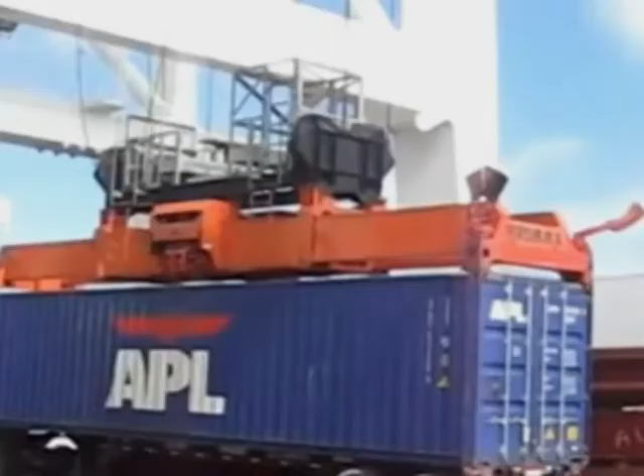Logistics is one of the lifelines of our economy. With globalization shaping our future economy, the need to transfer goods efficiently across countries becomes more and more demanding. We plan to provide a fast, economical, and environmentally friendly solution for logistics of goods across any terrain. Ideally, our vehicle drives off-road in the outback from point A to point B.

Truck drivers traveling long distances are most likely to experience tiredness and fatigue. Fatigue affects the driving ability and the driver's reaction to avoid a crash in an emergency. A study based on coroner and police reports found that 30% of rural crashes in Western Australia could be attributed to fatigue, while 20 to 25% of all fatal car accidents in Victoria are caused by fatigue.

In March 2010, a truck collided with a station wagon that was idled in N7's breakdown lane, killing a man behind the wheel. 2 weeks later, another truck ran into a group of cyclists riding in the bike lane of the N4, killing a man and injuring 3 others. Our aim to provide a fast, economical and environmentally friendly solution for land-based logistics is demonstrated in our driverless system.

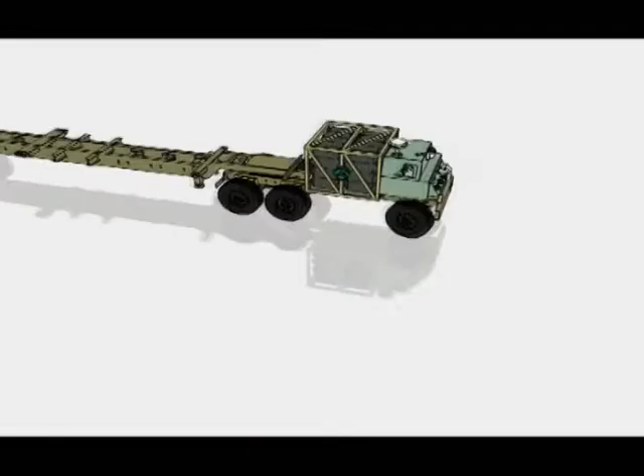Capable of off-road transport, this autonomous vehicle serves to provide a nationwide logistic pipeline between cities and industrial facilities such as mines and ports. To accommodate the needs of today's transport industry, our trailer bed is capable of carrying a variety of standard payloads: 40-foot containers, 20-foot containers, bulk goods and materials. By complying with International Organization for Standardization rules, our solution is easily integrated with existing logistical systems.

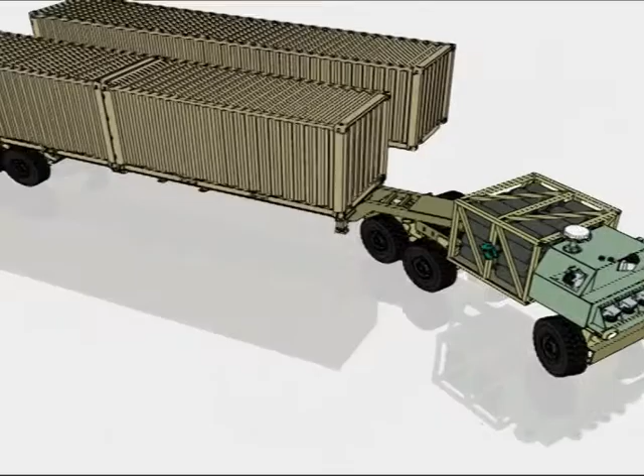Fifth wheel coupling provides a versatile trailer connection platform, allowing the clients to select an existing trailer based on their need. TAK4 independent suspension improves maneuverability, ride quality, and off-road mobility. With proven success on thousands of defense, firefighting, and tactical vehicles, TAK4 tackles the most treacherous terrains. Driving through rugged environments requires superior off-road capabilities such as superb shock absorbance, mechanical rigidity, and robustness. We have met these requirements.

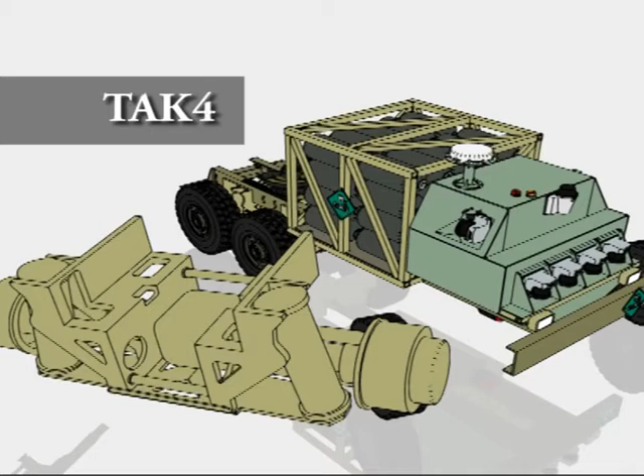The vehicle is driven by 3 70 kilowatt AC motors, where each is powered by a PWM inverter. The peak power output is estimated to be around 420 kilowatts. The nominal output is 210 kilowatts. Our vehicle utilizes hydrogen fuel cells to provide constant power of an extended duration. To store a sufficient amount of hydrogen, the gas is compressed to 700 bars. The robot is able to drive up to 500 kilometers using 120 kg of hydrogen.

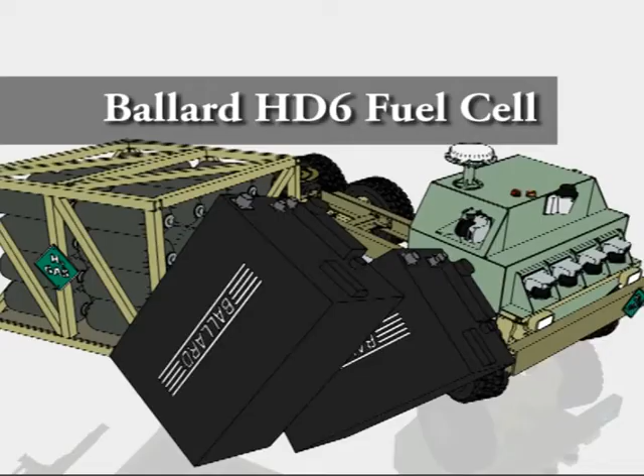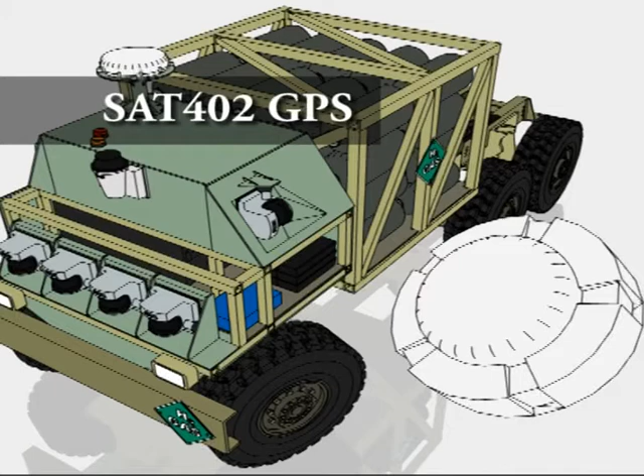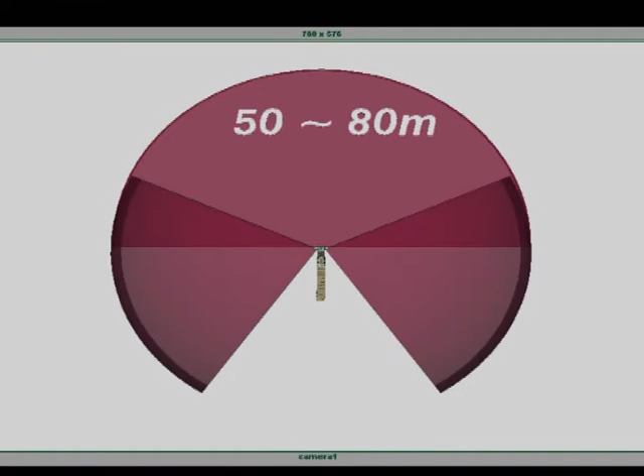To ensure fast data transfer between system components, CAN bus is employed on the vehicle. The Vehicular Terminal Explorer 727 turns our vehicle into a mobile communication hub. This, in conjunction with the SAT402 GPS system, ensures we can monitor the vehicle at all times. To effectively scan the environment, 6 mid-range LMS 221 and 1 long-range LDLRS 3100 SICK lasers are utilized. The long-range sensor is used to detect the static conditions of the environment, whereas the mid-range sensors are employed to detect dynamic obstacles, thus ensuring the safety of the vehicle and bystanders.

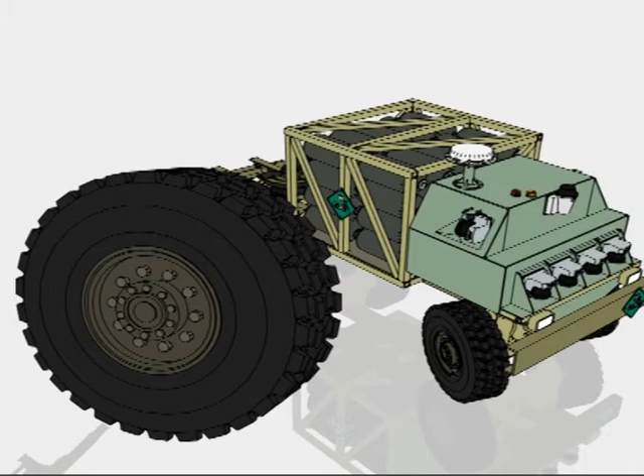Michelin's XZL all-terrain tubeless tires increase longevity, improve braking distances, and reduce rolling resistance, thus bringing fuel costs down. Providing excellent traction, these tires increase overall vehicle performance. The chassis is pretty similar to that of a regular heavy-duty truck. It consists of a rigid steel frame of C-shaped rails riveted together by cross members running across them. The roll cage is a conventional aluminium Pratt truss used to house the hydrogen fuel tanks. These, in conjunction with a steel bull bar, provide superb robustness to the vehicle.

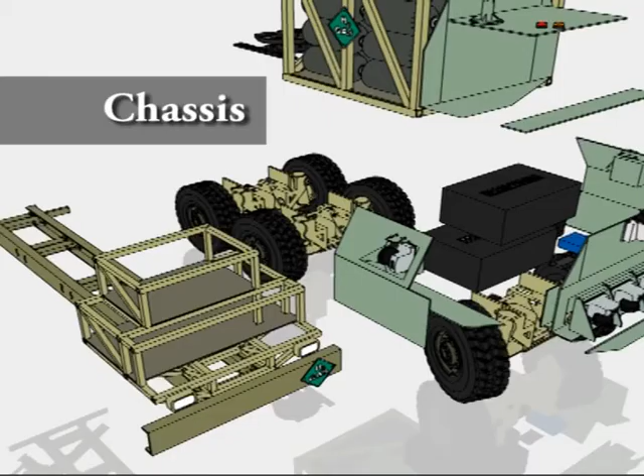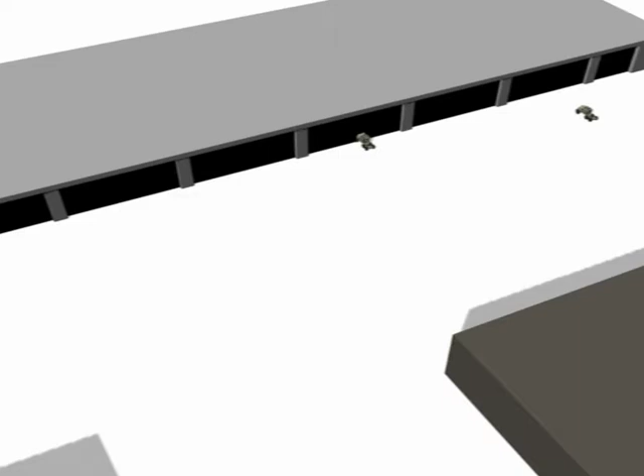Once our vehicle reaches its destination, it proceeds towards a container warehouse where it undocks its load. Having achieved this, the head of our truck advances to recharging and maintenance facilities where it is always kept in good condition and its hydrogen supply is replenished. A control tower adjacent to these facilities coordinates the motion of all our vehicles within the compound.

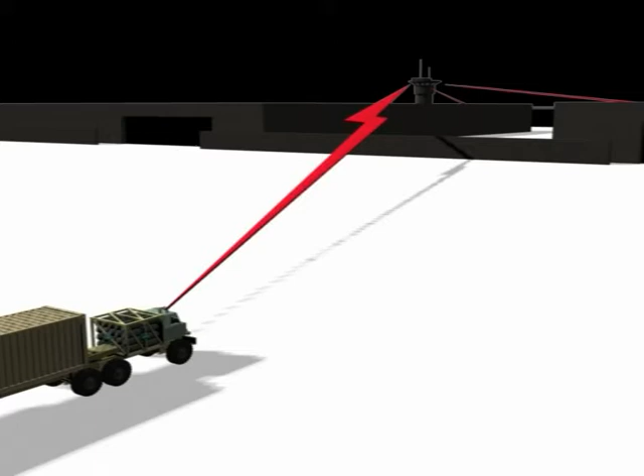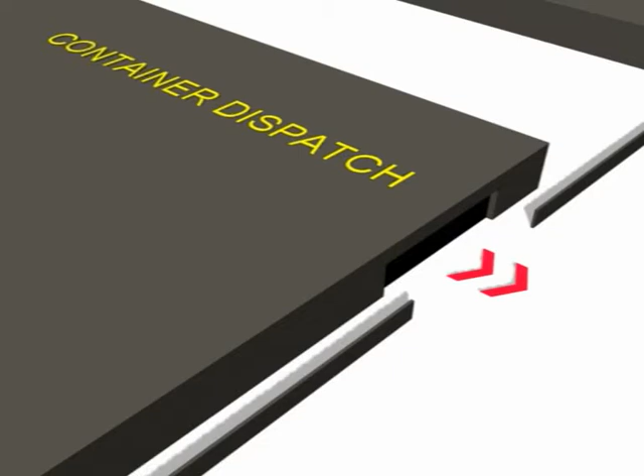The tower initially gains control upon vehicles' arrival. All our vehicles are 100% independent. However, the tower provides the overshadowing body needed for managing the vehicles collectively. The vehicle, now fully charged, can be dispatched to transport containers again, where it will progress to another compound similar to this one.

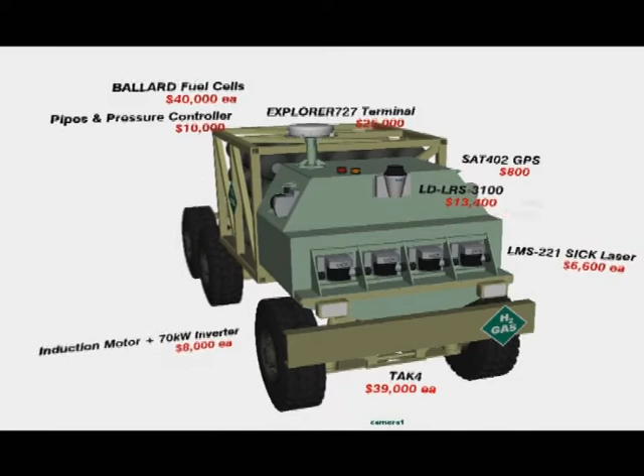Based on estimations, the following costs have been determined. It is estimated that it would take 18 months to develop the vehicle, costing $1 million. Production time is estimated to be 3 months, costing $300,000. Following profits have been predicted within the next decade.

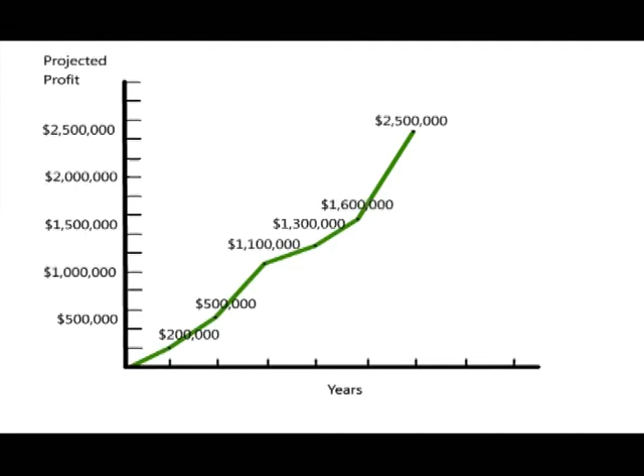The endpoint is automatically the start point of the Dijkstra. The path is achieved by an algorithm that looks from the current cell at its neighbors. It goes there where the cost is the lowest. It terminates when it reaches the endpoint. The path output isn't always optimized.

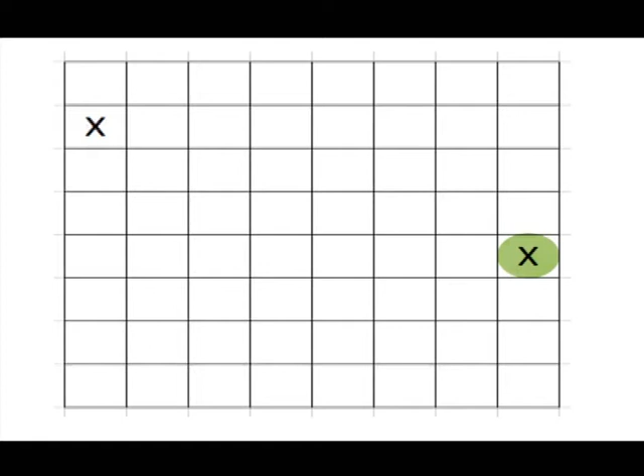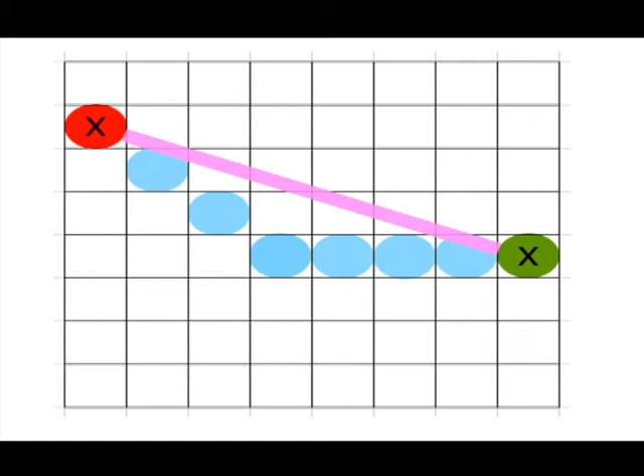Assume we have a field with a start and an endpoint. The Dijkstra output would mostly look like that. It can be clearly seen that the shortest way is the direct one. Optimizing the path is achieved by the following steps. First, the points between edges are cleared.

A travel function has to be created so that we can still go from cell to cell. Furthermore, for every edge point, this function must check if it can skip the next edge point and go directly to the next one. If there is no obstacle in the new way, the skipped edge point is cleared.

To effectively simulate the logistical robot's operation, it is important to focus on its navigation, mapping, and its ability to reach a specified destination. The vehicle's main purpose is to transport cargo for a client from point A to point B, using the quickest path available. The first stage in developing the simulation was to build a program in MATLAB for sculpting the landscape in which the vehicle would be tested.

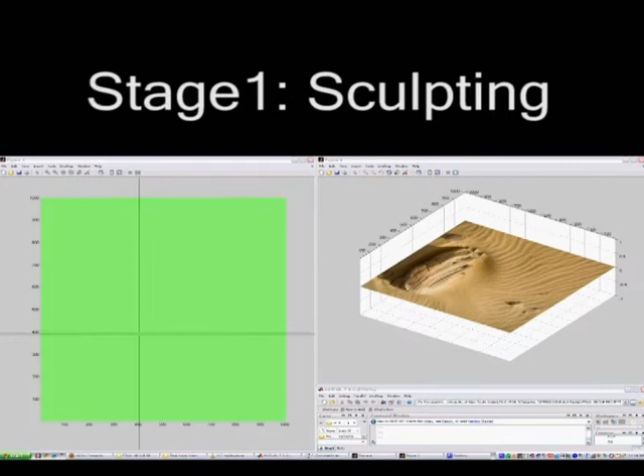This land sculpting program allows the user to manipulate the height of the land surface using a variety of tools, including a rounded brush for bulging or sinking a circular section, a rectangular brush for creating flat platforms, a ramp brush for constructing smooth transitions between heights, and a maze generator for converting image files into three-dimensional obstacles.

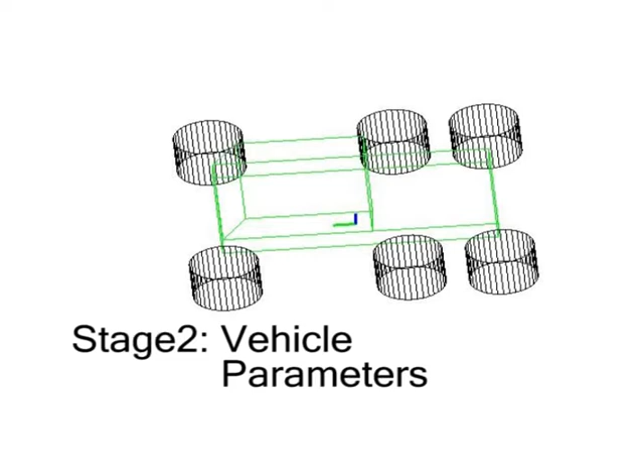The second stage was to define the vehicle's parameters and its interaction with the simulated environment. Vectors were utilized to represent the forward and upward directions of the vehicle. A rotation matrix was used to place the vehicle's skin appropriately. As the vehicle was moved over the landscape, the height of each wheel was independently calculated. From this, the height of the body was updated, along with the angle of the forward and upward direction vectors. In this way, the vehicle was able to hug the land over which it drove.

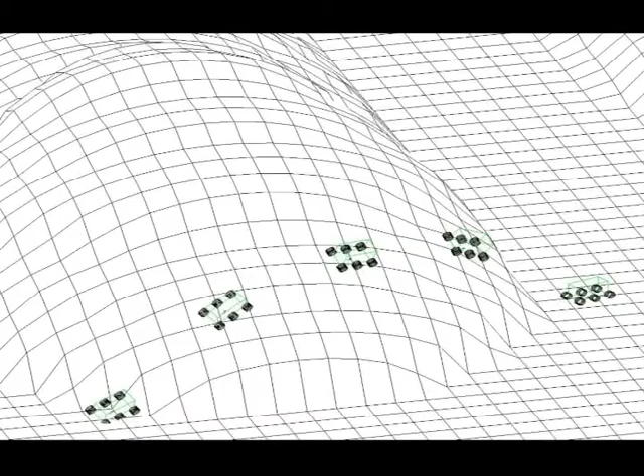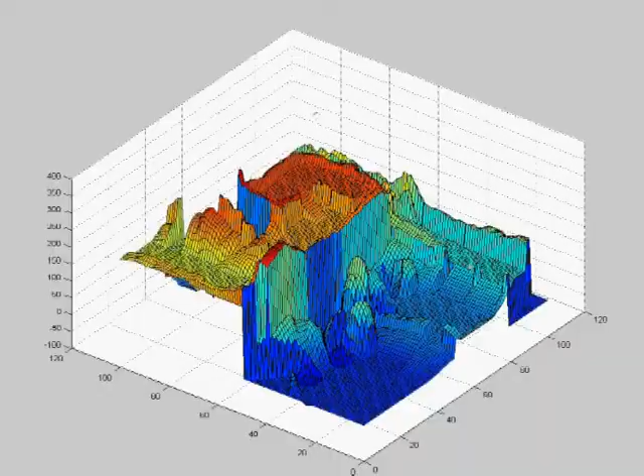The third stage was to recreate the manner in which the vehicle sensed its virtual environment. By reading in the points of the surrounding environment in a semicircular arc, the vehicle's SICK laser sensor was simulated. Differentiating this data, angles were calculated and the vehicle's occupancy grid was generated based on the vehicle's limitation.

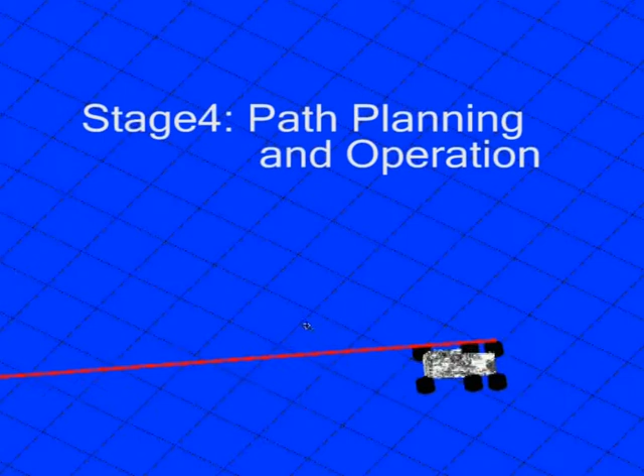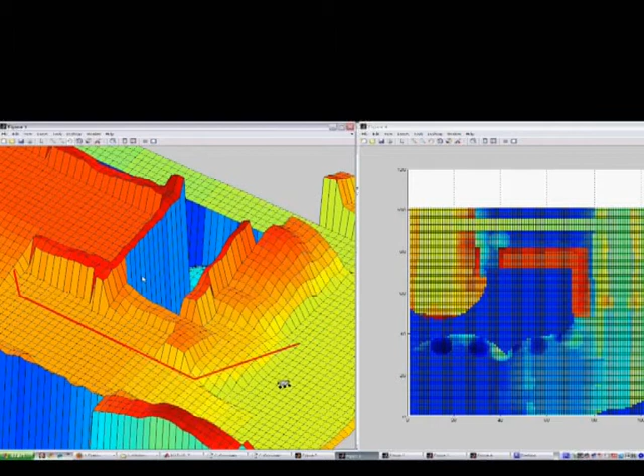The fourth stage was calculating a path using a Dijkstra algorithm based on the vehicle's occupancy grid and driving the vehicle along this path until it reached its destination. The start and end points of the vehicle's path could be reset during the simulation. As the vehicle drove along, it built an occupancy grid using its virtual sensor and updated its path, bending it around obstacles. If the destination was unreachable, the simulation returned a string notifying the operator in the MATLAB console.

After rigorously testing the vehicle through multiple environments of varying difficulty and layout, the vehicle was found to be largely successful in navigating, mapping, and most importantly, reaching its final destination.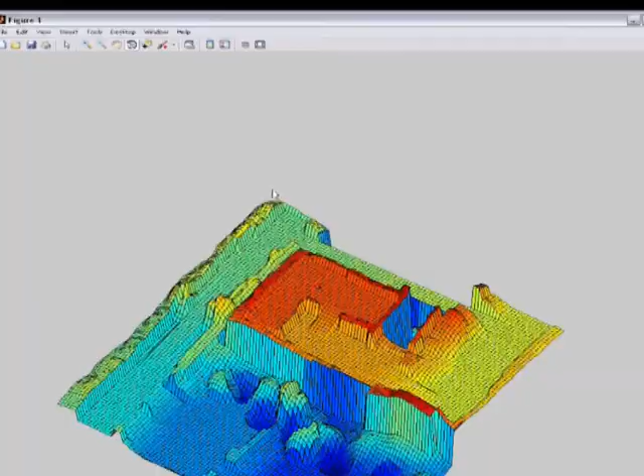Oh my god, but hydrogen is like so dangerous. No! You see, hydrogen has actually been proven to be a safe, efficient and environmentally friendly energy source. Just ask my friend, Professor Oliver John.

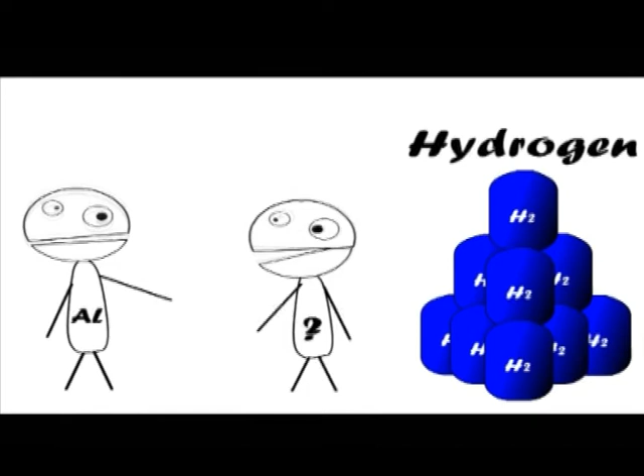Because electric and hydrogen power becomes the most important power source for cars in the future, the manufacturers and the government wanted to know about the risk before using this technology in everyday life. The University of Miami, in cooperation with car manufacturers, conducted an experiment which compares the severity of hydrogen and gasoline fuel leaks with ignition. So let's talk about this experimental setup.

The damage to the gasoline-powered vehicle was severe, while the hydrogen-powered vehicle was nearly undamaged. This proves that the usage of hydrogen is safer than common gasoline.

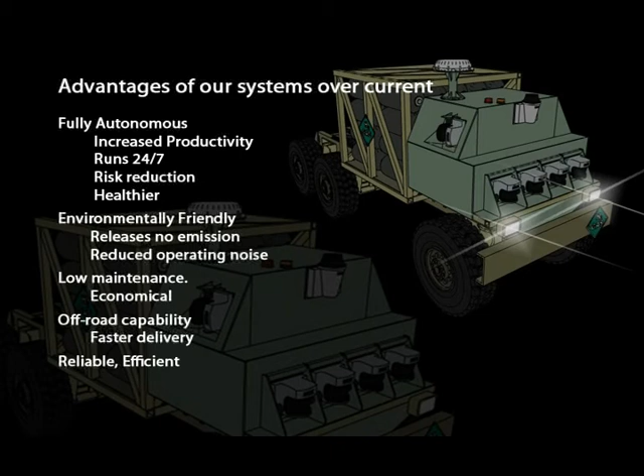Our vehicle is fully autonomous. This will increase productivity since it can run 24/7 from start to stop. It also removes the possibility of human operation in hazardous areas and ensures better health of community by eliminating driver fatigue. Furthermore, it is environmentally friendly as it releases no emissions and reduces noise pollution through induction motor and fuel cell technology. Additionally, it is low maintenance and has off-road capabilities, which leads to faster deliveries.